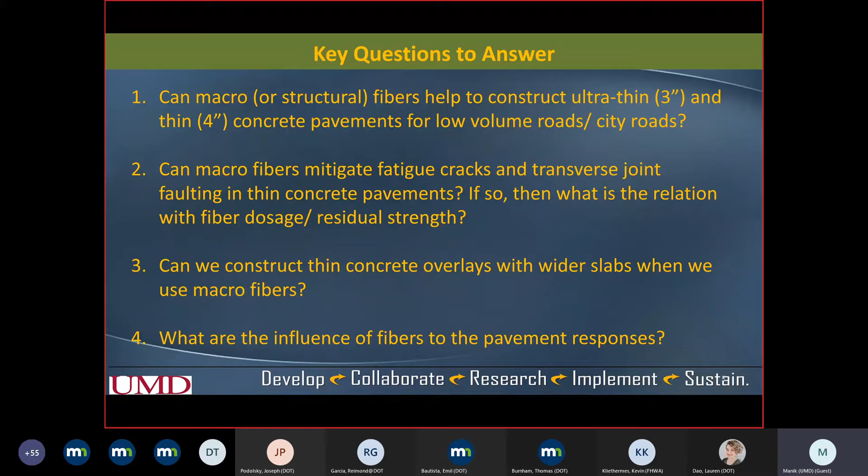Today I'm going to focus on some key questions, basically what we learned from this research project. The questions we had: can structural fibers help construct ultra-thin, like 3-inch or 4-inch thin concrete pavements for low volume roads and city roads? Can macrofibers mitigate fatigue cracks and transverse joint faulting in thin concrete pavements? If so, what is the relation between fiber dose and residual strength? Can we construct thin concrete overlays with wider slabs when we use macro fibers? And what is the influence of fibers on pavement responses? Those are the key questions, and I will be focusing mainly on these four. Let's see what answers we get.

In order to answer those questions, in 2017, 8 cells were constructed. Two were constructed on the low volume road test track, cells 139 and 239, and the others were on the westbound I-94 section of the mainline road. All those cells were designed basically for low volume roads. Even though 6 of the cells were constructed on I-94, we applied accelerated loading like under interstate traffic, but those are not designed for 20 or 30-year interstate traffic—they are intended for low volume roads.

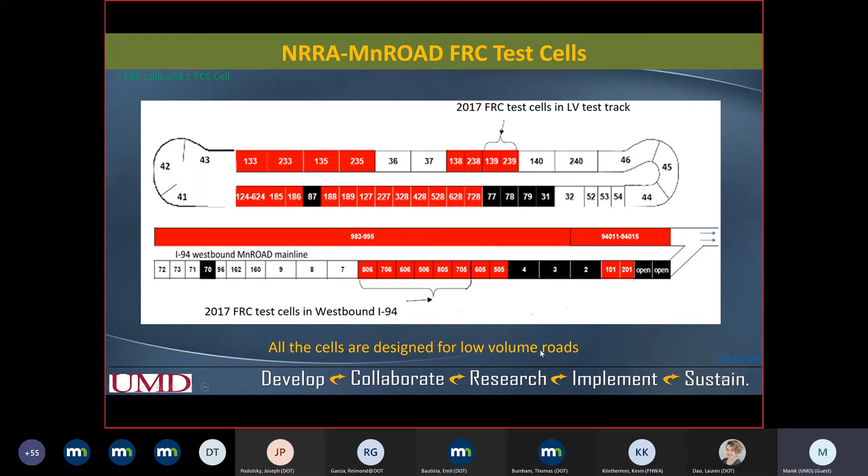So that we can see the failure early, those were constructed on the interstate. Out of the 6 cells, 4 were actually constructed on concrete, on gravel, and the other 2 were concrete overlay.

I call them pavement cells because these are directly constructed on the gravel layer, not an overlay. Cells 506 through 806 were constructed on a relatively thick base layer, 11 inches. The objective of these 4 cells was to study the influence of fiber dose variations. The first one was plain concrete, then others used fiber reinforced concrete with incremental doses.

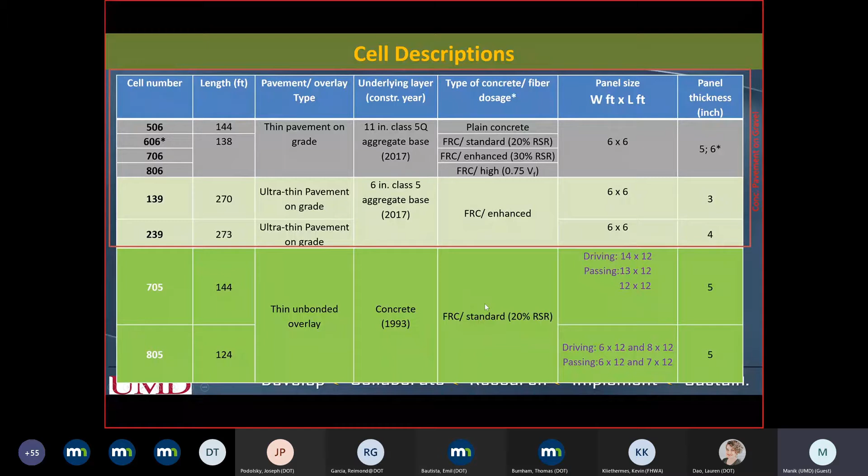Cells 705 and 805 are thin concrete overlay. I'll also be talking about the structure later on when we specifically discuss their distresses.

The picture here shows the fibers that were used in the construction of the cells other than 506. 506 did not have any fiber, which was a control section.

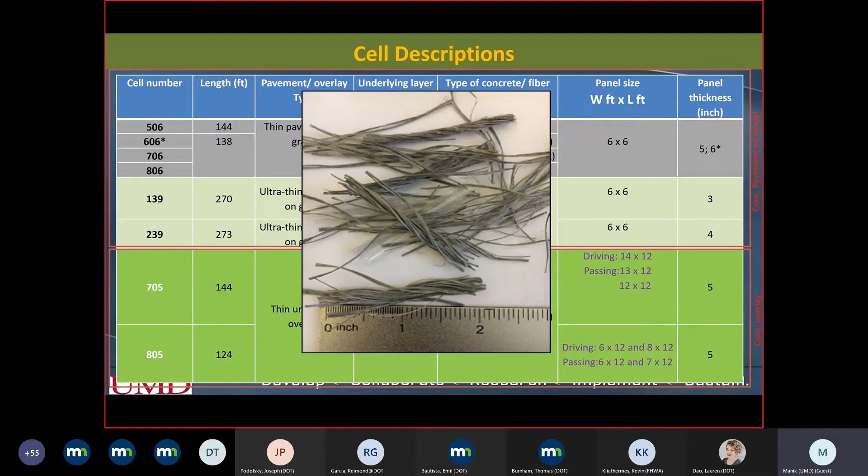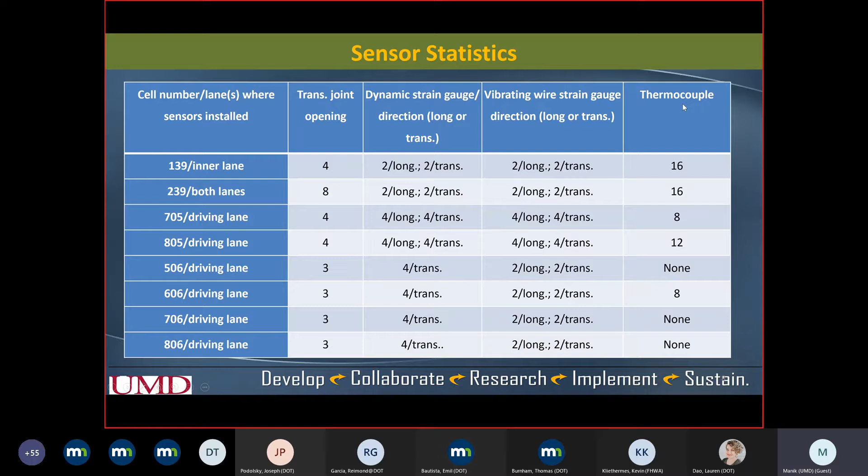These cells were heavily instrumented. I'm not going to read all the numbers of the sensors, but transverse joint opening sensors were installed to track joint movement, along with dynamic strain gauges, vibrating wire strain gauges, and thermocouples. This is an example of the sensor and test locations.

These are for cells 705 and 805. Pretty much the same kind of sensor plan was used for all 8 cells. Thermocouples were not installed in all the cells, but otherwise it's the same.

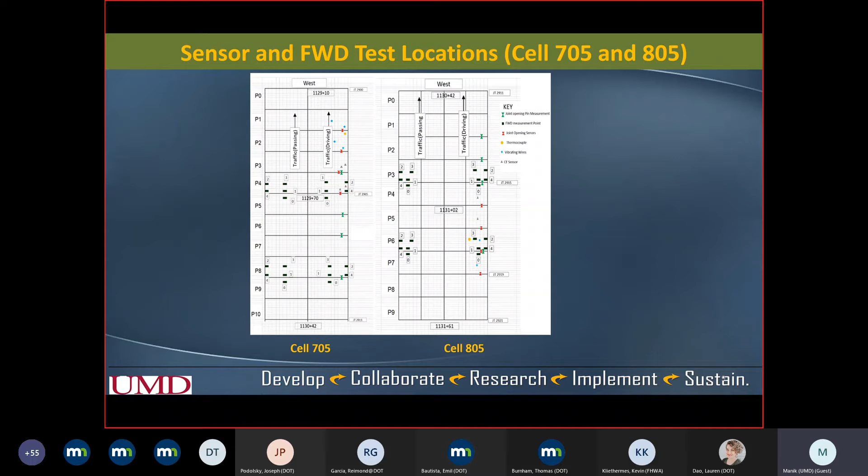These black rectangles are FWD test locations. You can see the test was done on the wheel path at the center, and at different locations of the sensors. We already have a final report from this project, which is shared online, and additional details of the sensors and test locations can be found there.

All right, let's get into question number 1. Just to remind you, the question: can macro fibers help construct ultra-thin and thin concrete pavements for low volume roads?

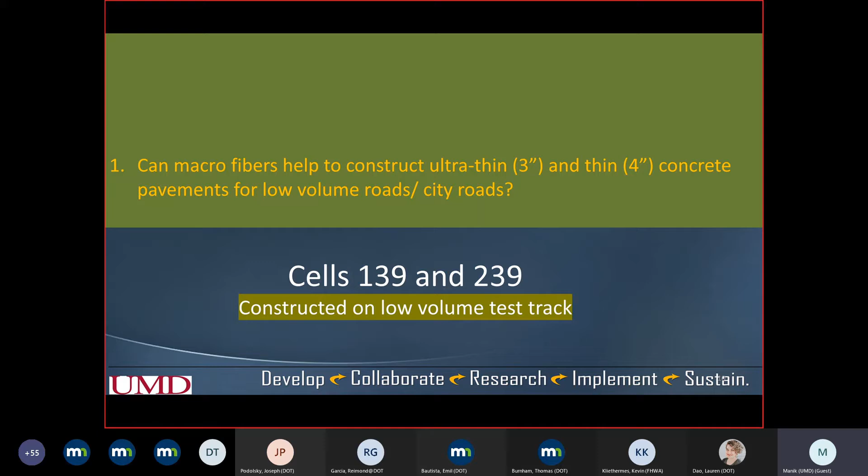We know 3-inch, 4-inch thick asphalt pavements are common surface layers in city streets. So we wondered, if we use fibers in concrete, can we do the same thing using concrete?

A little more about the structure of these two cells: Cell 139 was 3-inch and 239 was 4-inch. All other variables were the same. Fiber was 8 pounds per cubic yard, 6 feet by 6 feet slab.

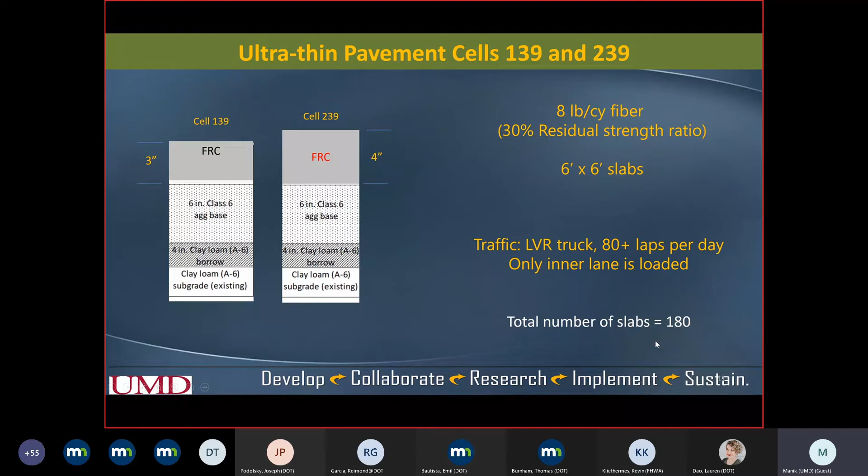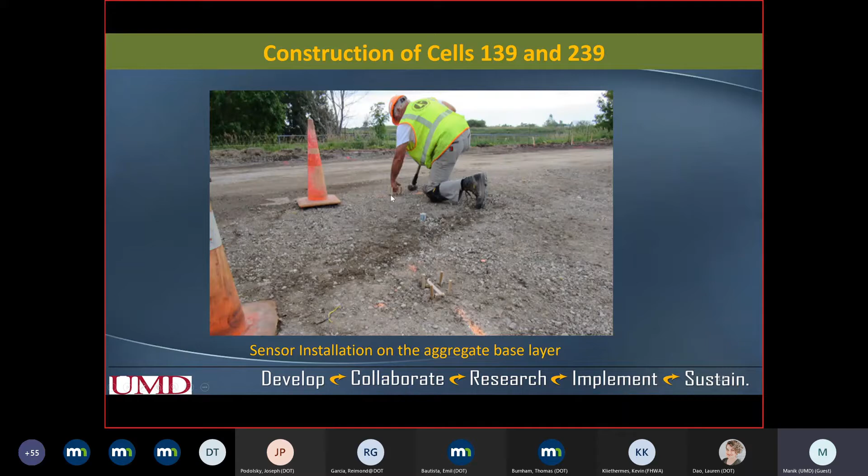Here are a few pictures of the construction on the compacted gravel layer, which is the base layer. Sensors are being installed - this is a picture of the dynamic sensor. Then concrete pouring and paving. You can see the very thin structure.

Joint opening sensors were installed later on at the transverse joint. These sensors work by comparing to an initial reading, which changes as the slabs move inward and outward.

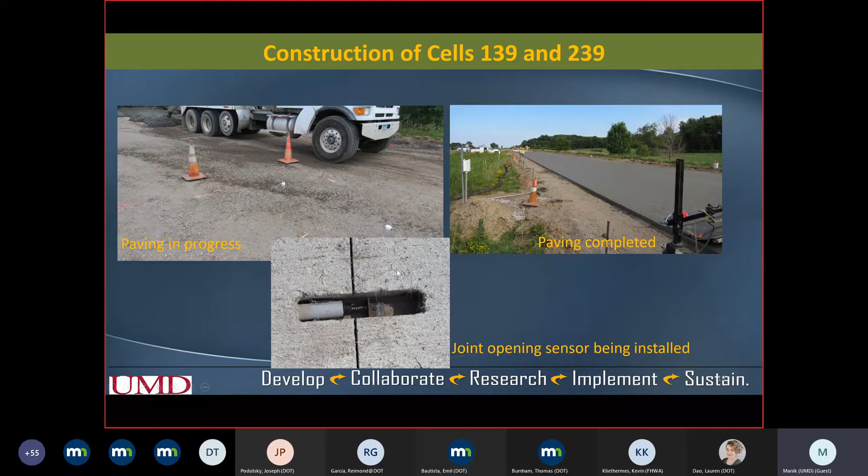Now, at a really early age, before 28 days, within about a week, construction traffic came onto cell 139, and this crack resulted right after. The crack propagated and became alligator cracking in the asphalt pavement. You can see at 35,000 equivalent single axle loads how it looks, and at 63,000 ESALs, the thin structure had shattered.

Thanks to Len for doing this distress map - you can understand how much effort he had to put into it.

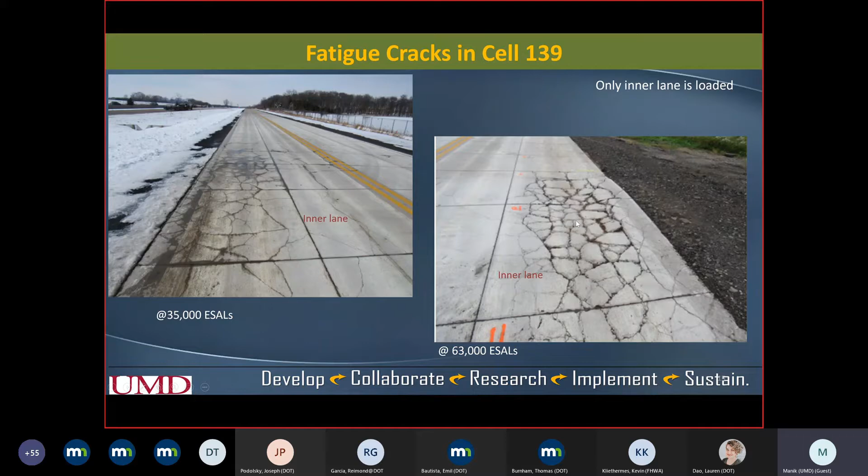So cracks all over. And then in 2018, some of these slabs, I think 14 slabs, were replaced with 4-inch thick pavement.

Now on cell 239, which was 4-inch thick, we saw far less crack. You can see longitudinal crack, and at the end of the research study's data collection, we saw 20% of slab already cracked by March 2020, which was after 145,000 ESALs. So now if we design a road on a rural road, let's say, MnDOT's traffic category 2 anticipates 1 million ESALs. So this pavement cracked, and it's still in service, but 20% of the slab cracked in 2020 itself, just at 145,000 ESALs. The picture on the right shows the location of the crack, and further details are available in our research report.

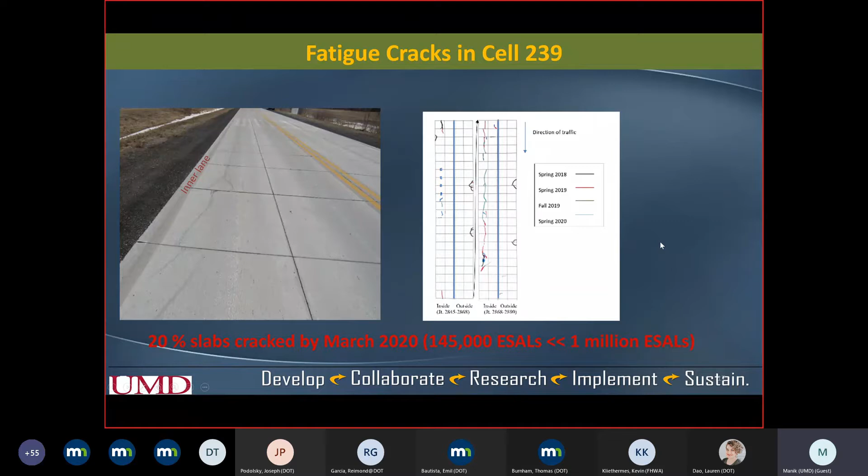These are the color-coded distress maps. You can see the crack occurred almost every year. Initially in the 2018 data you can see some black lines, and then at different years or seasons they continued to propagate.

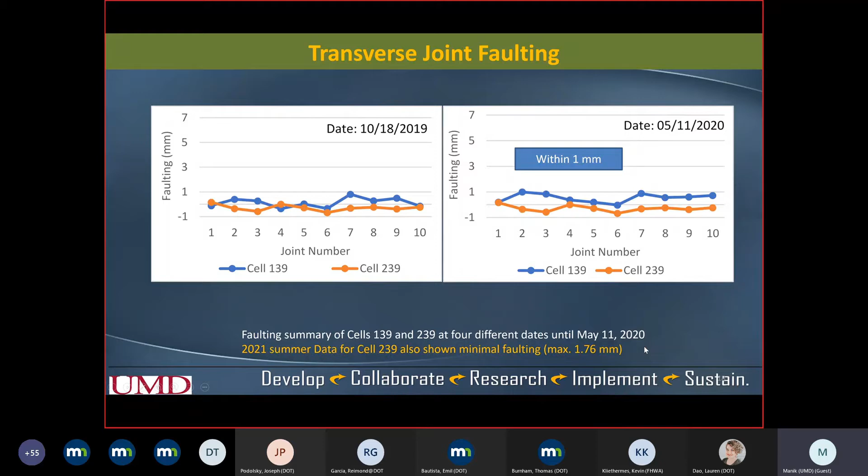The faulting was really less. You can see two different dates here, it's really very low, within 1 millimeter. Now, Tom has given me some faulting data collected this year in August, and based on his data, the faulting is still less in 239, and I checked the data. The maximum was 1.76 millimeters at a couple of joints. So faulting was not an issue. The cracks were the issue.

So what you learn is that the 3-inch slab was too thin on a 6-inch gravel base. The construction of such an ultra-thin slab on a marginal base is not recommended, as they may fail before the anticipated design life, irrespective of fiber inclusion. But fiber was found to be holding the shattered concrete pieces of cell 139 together for some time. Cell 239, which was 1 inch thicker, is still performing, but of course cracked. More than 20% crack was there in 2020 itself, but the performance is significantly better than 139, and fibers are holding the cracks together. So that's the kind of visible observations we have seen.

The longitudinal cracks in the wheel path are the dominating distress, and it makes sense because the structure is very thin, so the stress is right under the wheel path because the load stresses in the very thin concrete are really high. Joint faulting, as we saw, was not an issue so far because we saw the cracks earlier, and the total number of ESALs on these 139 and 239 cells were really far less than the anticipated design ESAL, so we did not see any faulting. Faulting takes some time to occur.

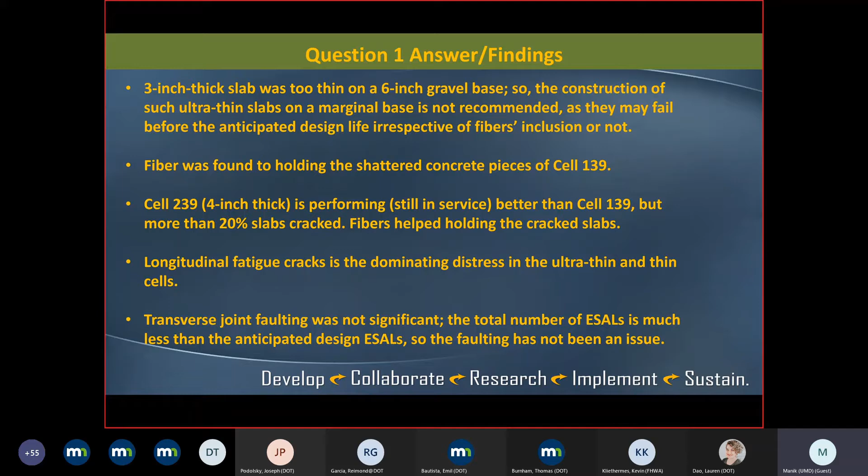I mean, time or traffic load repetitions. Question number 2: can macro fibers mitigate fatigue cracks and transverse joint faulting in thin concrete pavement? And if so, what is the relation with fiber doses or residual strength ratio?

So in order to get the answer for these questions, we will focus on the results of cells 506 through 806. And I would remind you, these were constructed on I-94, but the design is intended for low volume roads. The design thickness is only 5 inches, which is not typical for an interstate pavement. 2 million is also MnDOT's low volume road traffic level 2 category, so let's say the design is 2 million.

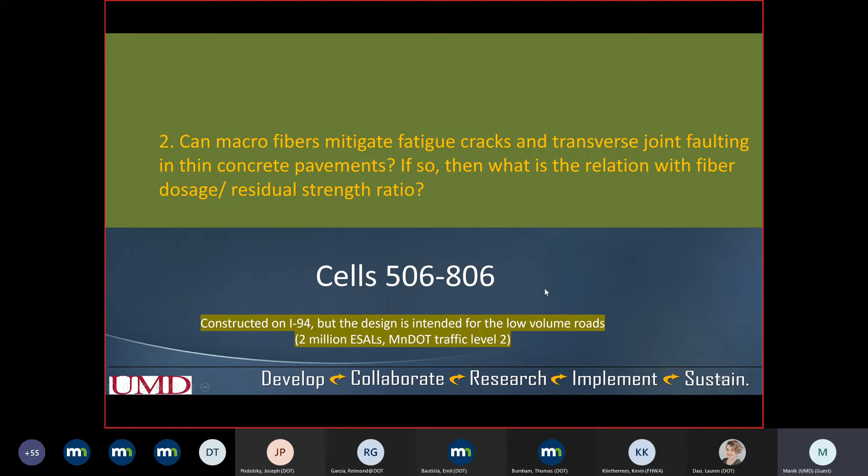A little bit about the structure. Cell 506 didn't have any fibers, and it is 5 inches thick. Cell 606 has fiber, 5 pounds of fiber per cubic yard of concrete, and we targeted a 20% residual strength ratio. Even though it was planned to be constructed at 5 inches, somehow the construction thickness was found to be 6 inches. Cells 706 and 806 are 5 inches, and had more fibers, with 806 the highest at 11.7 pounds of fiber, which is a lot of fiber to mix into the concrete pavement.

Traffic, again, it is interstate, generally about 1 million ESALs per year. This residual strength ratio reported is from ASTM C1609 tests on beams prepared at the site, which were brought to the lab and tested. Again, a little reminder about the structure: right under the slab, we had 11 inches of class 5Q aggregate base. The last one, for cells 139 and 239, had 6 inches. Now it's 11 inches, you can see, and it makes sense, since it's on the interstate.

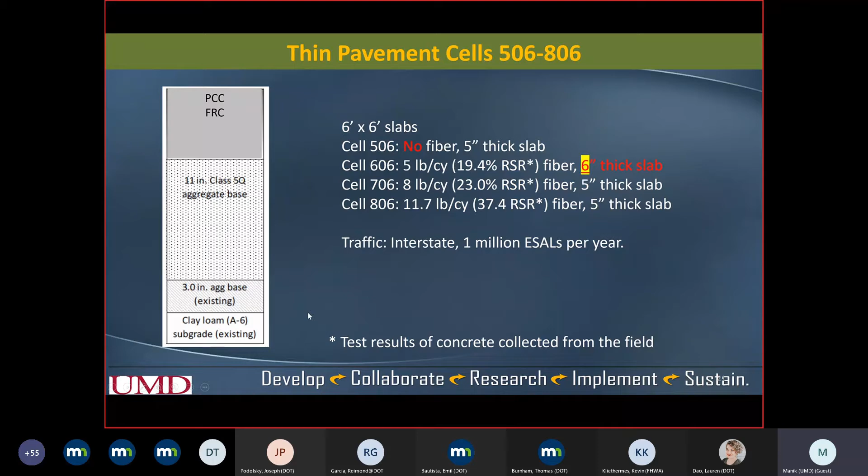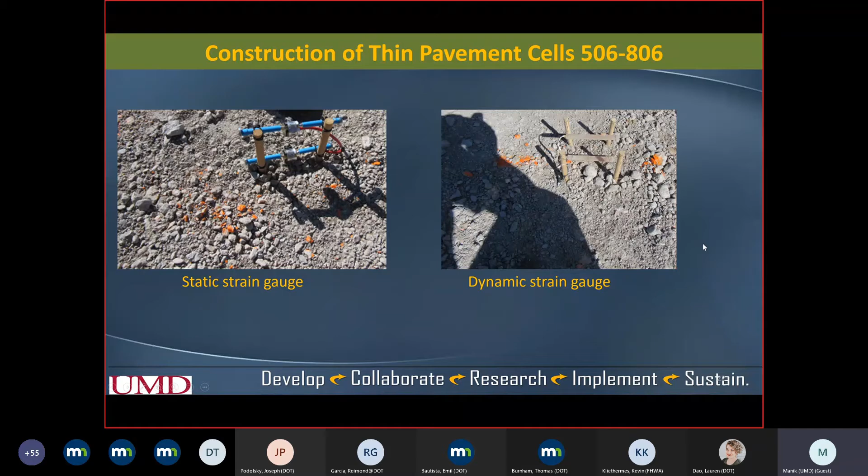A couple of pictures here - this is the static strain gauge, and this is the dynamic strain gauge picture. I was there when cell 806 was paved. These are some pictures I took, or also collected from my MnDOT colleagues. I'm sorry about the resolution because of the virtual presentation - I kept the file size small so there's no delay.

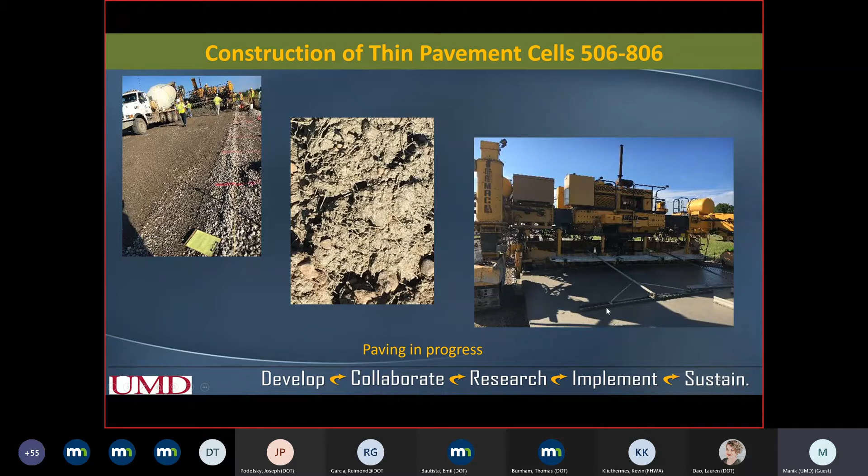This is a close shot of the concrete I took. It looks like there were some issues in the mixing, but overall the mix was not bad - it looks like good workable concrete.

Well, not all. This picture shows some sample preparation - you can see they're preparing the beam on the side. This is a close-up picture of the concrete, how it looks.

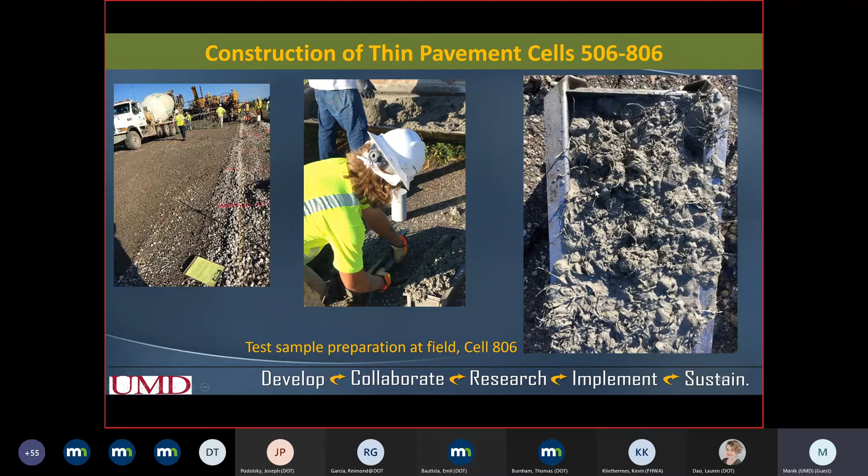It looks good and workable, but look at the fibers - this was from 806, which had 11.7 pounds of fiber. Fibers are all over, you can see. The nature of the fiber was that it did not remain very straight - it took the shape along with, basically followed, the aggregate shape.

Well, not everywhere was the workability great - this is one very popular picture. Again, cell 806 had 11.7 pounds per cubic yard of fiber, and I saw something like that happen too. But anyway, eventually this is the finished product.

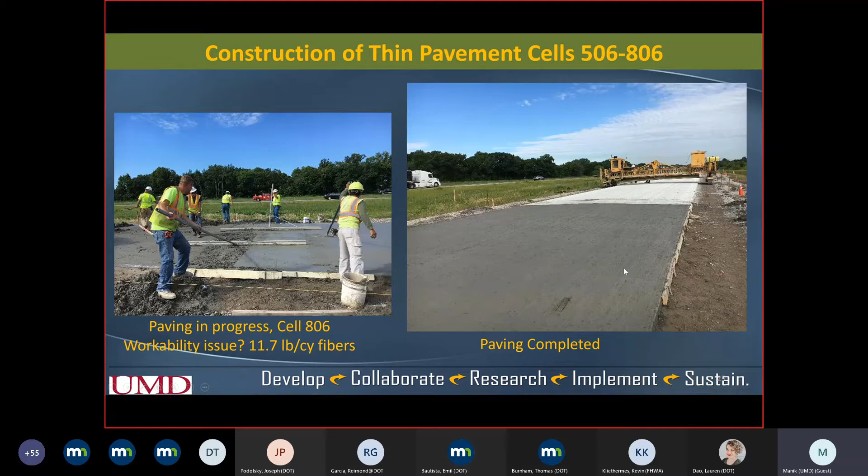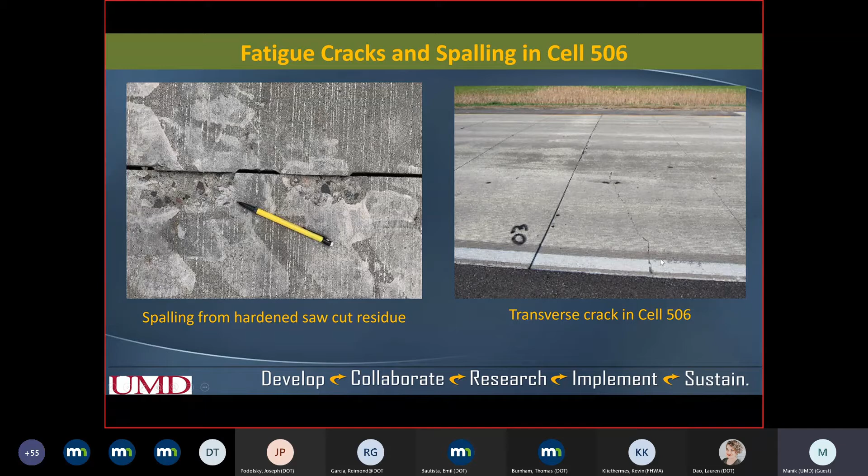We saw cracks in 506 in the first year itself. The total number of cracks we saw in cell 506 was 3, and all of them occurred in the same area. You can see on this picture the location of the spalling and the location of the crack - all 3 cracks actually occurred at one location. I'm not sure, but it looks like this zone probably had some problem, or something is different in the base.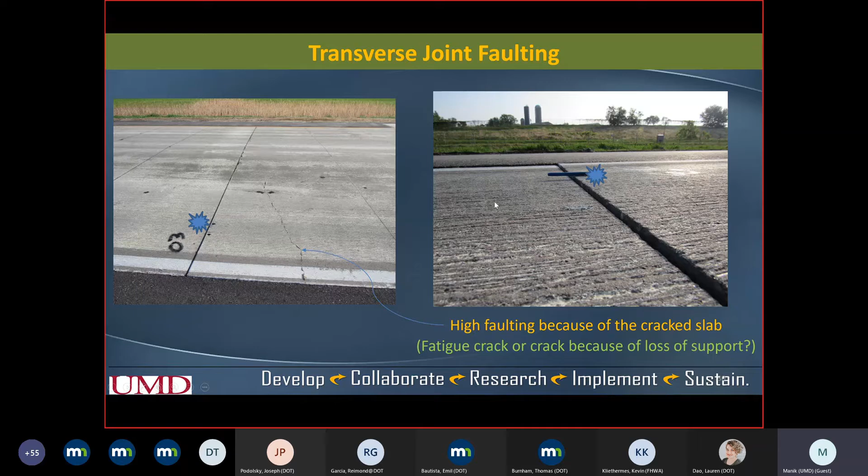When we looked at the faulting data for the 4 cells and compared them, definitely 806, which had the highest amount of fiber at 11.7, had less faulting than cell 506, which had no fiber. You can see here this blue line versus the brown line.

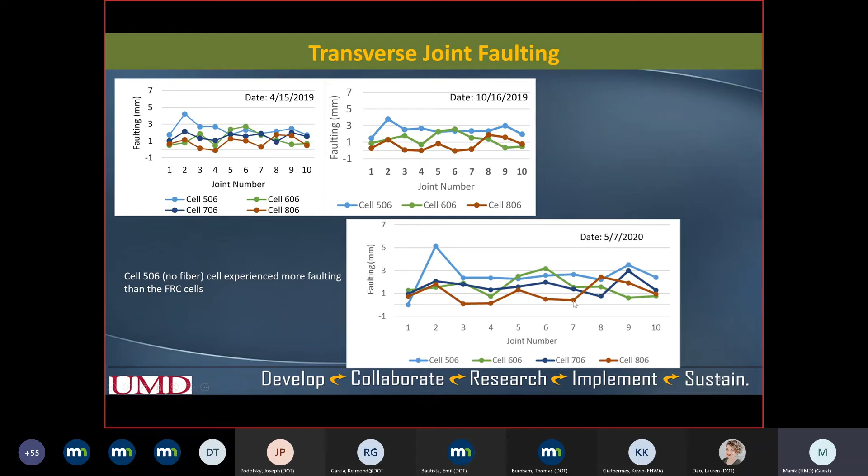And then you can see this effect of fiber dose. Cell 506 did not have any fiber, and their faulting was more than the other cells with 8-0-6 low. Now all these cells have data from different dates. As you can see, the first blue is April 2018, and the last one here is 2020. So all the cells' faulting increased with the traffic.

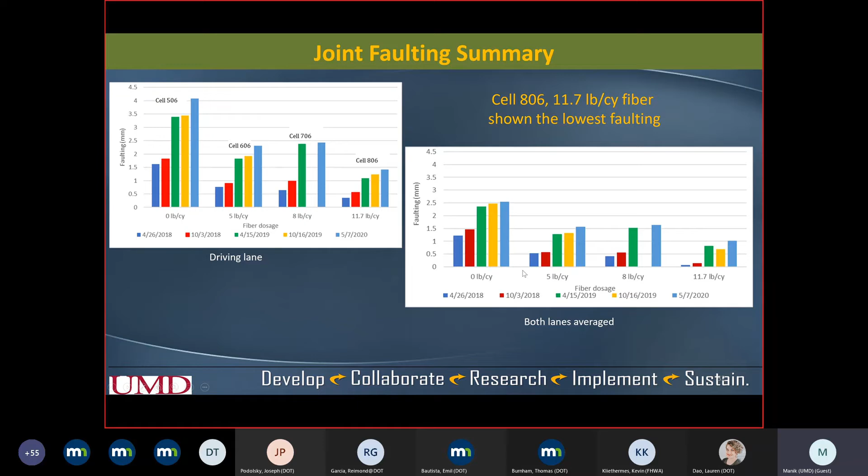Now this was only the driving lane, and this is both lanes when we averaged. Tom has provided some data for August 2021 this year. We saw here eventually the faulting of all the cells increasing aggressively. Maybe the fiber's effects are gone or going. So you can see now 506, 606, 706, 806 have almost the same or similar faulting values now. And this is again the driving lane and the both-lane averaged.

All right, now, yeah, but it is outside the design life.

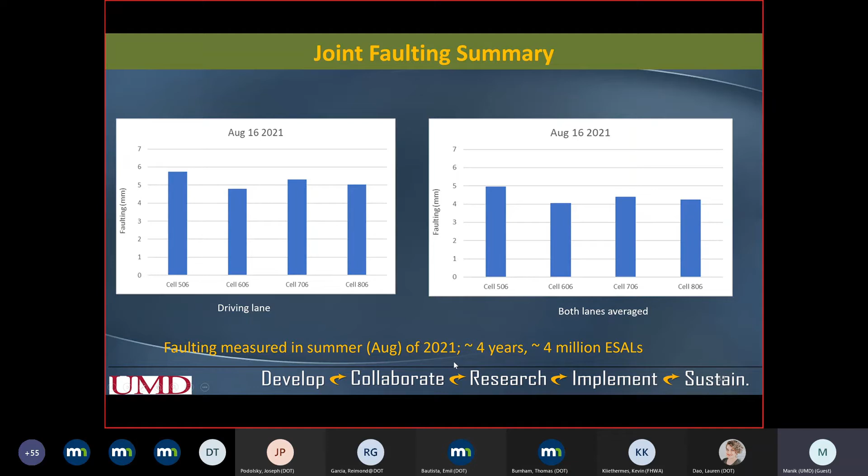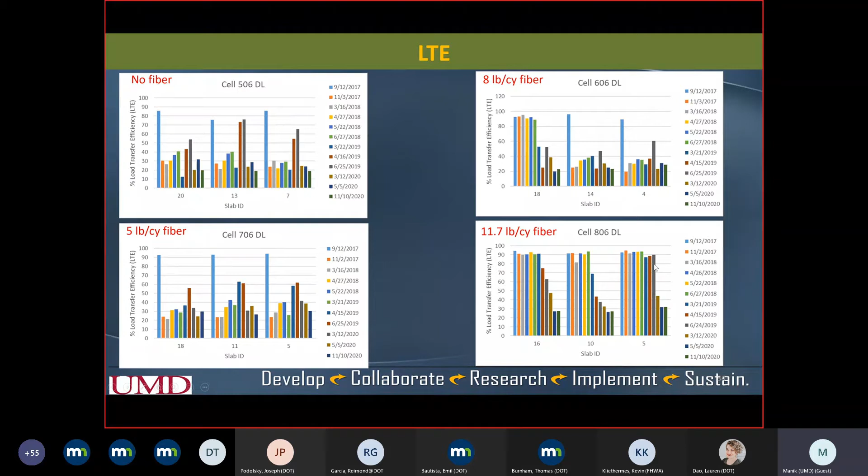When we looked at the load transfer efficiency with no fiber, we saw the load transfer in the very first test was really high, and then after that it really dropped. Now 606, 706 had 5 pound and 8 pound fibers. Their behavior was not significantly different from the plain concrete, but cell 806, which had around 11.7 pound fiber, you can see with different dates, the load transfer did not decrease until about 1.8 million ESALs, and at 1.8 million ESALs the load transfer dropped significantly, not in almost all the joints, but 1 or 2 joints probably didn't show that much decline.

This one, faulting versus ESALs for the 4 cells, again 506, you can see it has increased. Others also increased, but after 1.8 million ESALs, you can see all the cells suddenly had faulting suddenly increase.

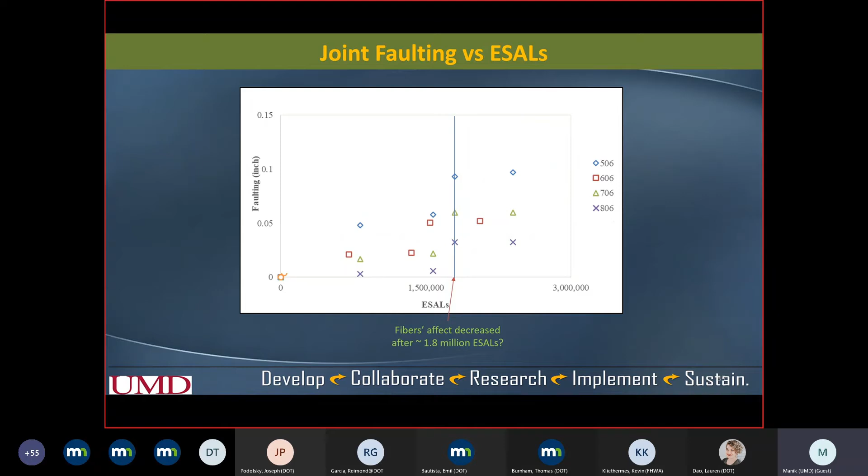We also looked at the International Roughness Index, and we coined a factor called faulting index. Faulting index basically takes care of the faulting for all the joints, and then if you convert it into per mile, the unit inch per mile is the same as the unit for the IRI. So these lines are basically faulting index, and these bars here are the IRI.

So the IRI values for the plain concrete were high from the very beginning. You can see the blue line here. When you looked at the IRI value, we found out that at 1.7 million ESALs, the IRI actually exceeded the critical value, like 173 inches per mile, and at that time faulting was 0.1 inch.

So what I would like to say here is 6 foot slabs have twice the number of joints compared to conventional joints. So if we drive on faulted joints of the smaller slab size compared to like 12 feet by 12 feet, which is used in conventional pavement, the IRI can be high because of more joints even with less faulting. So the faulting value is 0.1 inch here, but the IRI actually exceeded the threshold value. We also developed some relation between the faulting index and IRI, and we saw there is a good correlation, like more faulting, more IRI.

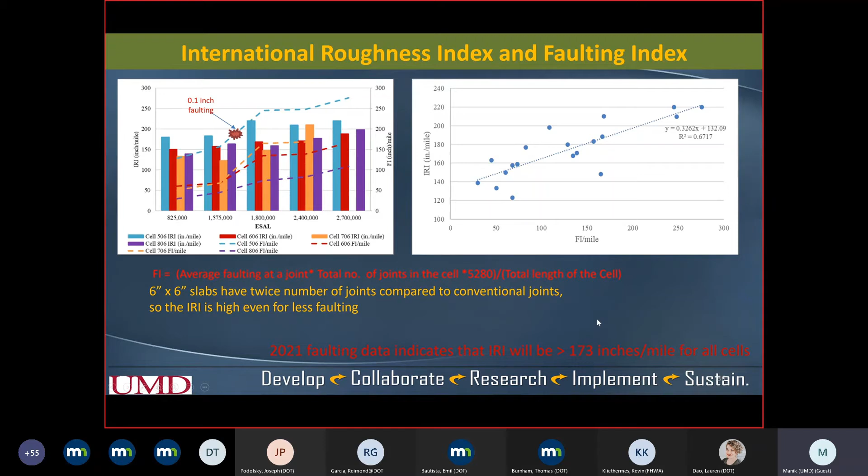So what we learned from this, 506 to 806: with regards to fatigue cracking, only cell 506 experienced 3 cracks at one location. Therefore, it is hard to quantify the contribution of fibers in mitigating fatigue cracks from this study. Regarding the faulting, fiber influence was observed in cells 506 through 806. Cells 606, 706, and 806 showed less faulting than cell 506 with no fiber.

With enough loadings, far more than typical design, significant faulting eventually developed in all cells. Fibers were holding the LTE higher for up to 1.8 million ESALs. IRI for cell 506 exceeded the threshold of 173 inches per mile at 1.75 million ESALs. FRC cells did not reach that even after 2.5 million ESALs. So fibers contributed to keeping the IRI better.

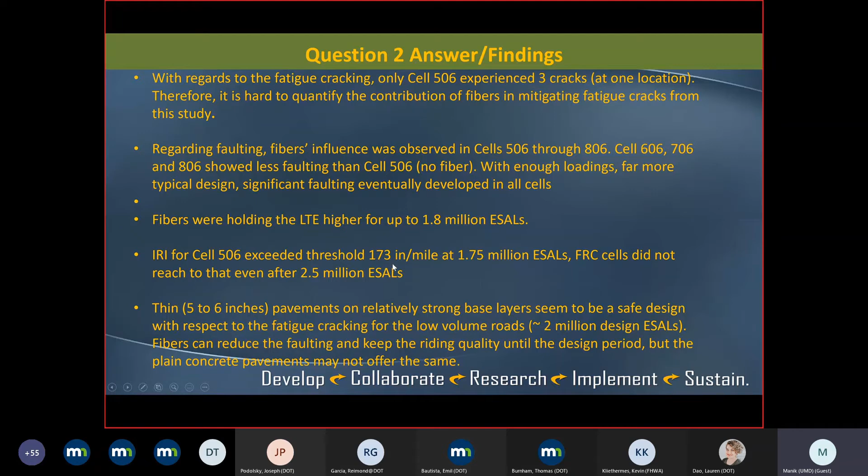So thin pavements on relatively strong base layers seem to be a safe design with respect to fatigue cracking for low volume roads up to 2 million ESALs. Fibers can reduce faulting and keep the riding quality until the design period, but plain concrete pavements may not offer the same. We saw the 506 cell reached the critical value of 173 even before 2 million ESALs.

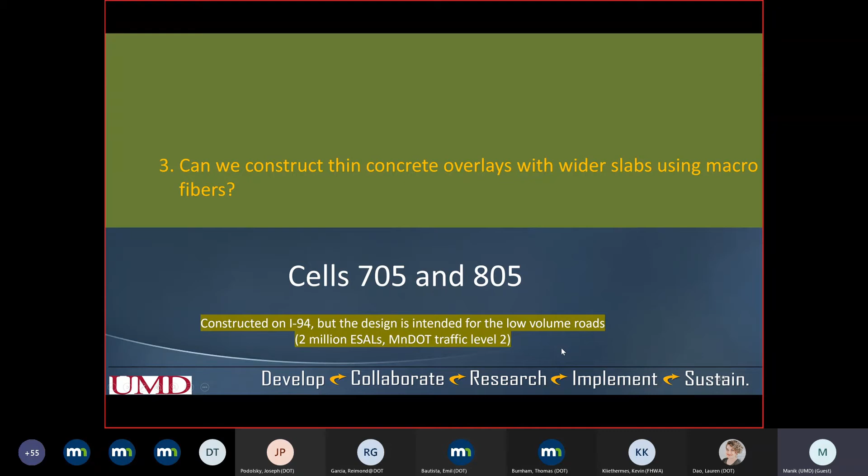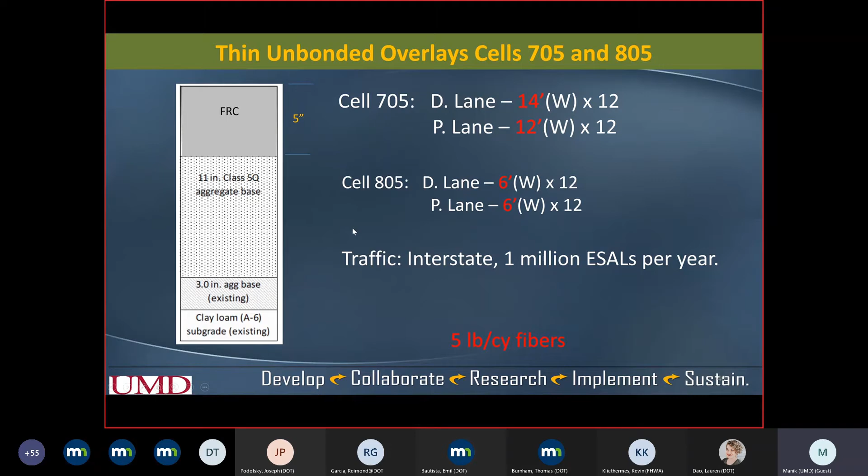Question number 3: Can we construct thin concrete overlays with wider slabs using macro fibers? For that, the data of cells 705 and 805 were used. Again, those cells were constructed on the interstate traffic, I-94. Cell 705 had larger size slabs, 14 feet by 12 feet, and 12 feet by 12 feet slabs in the passing lane was the slab size. The width of slab for the other cell was 6 feet, or half of cell 705. Again, interstate traffic at 1 million ESALs per year, and the fiber used here was 5 pound.

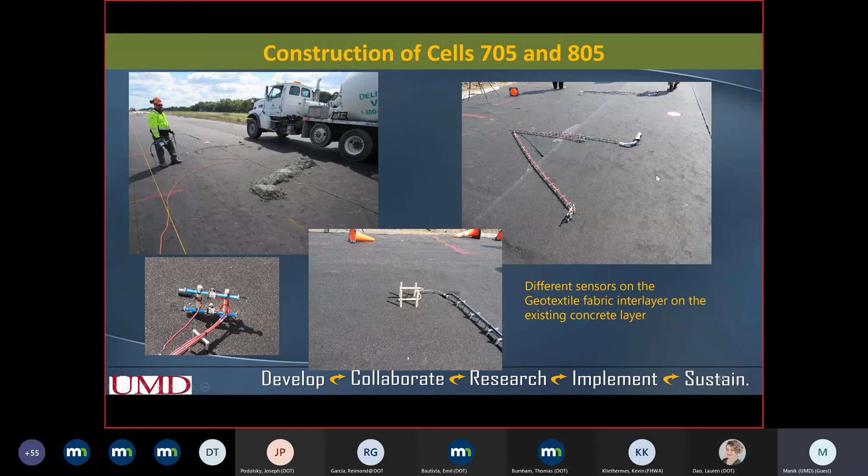These are some pictures from during the construction time. Some sensors you can see installed, and this overlay was constructed as an unbonded overlay. You can see a geotextile fabric interlayer was used on top of the existing concrete before placing the new concrete. Here are some more pictures, and this is the finished product.

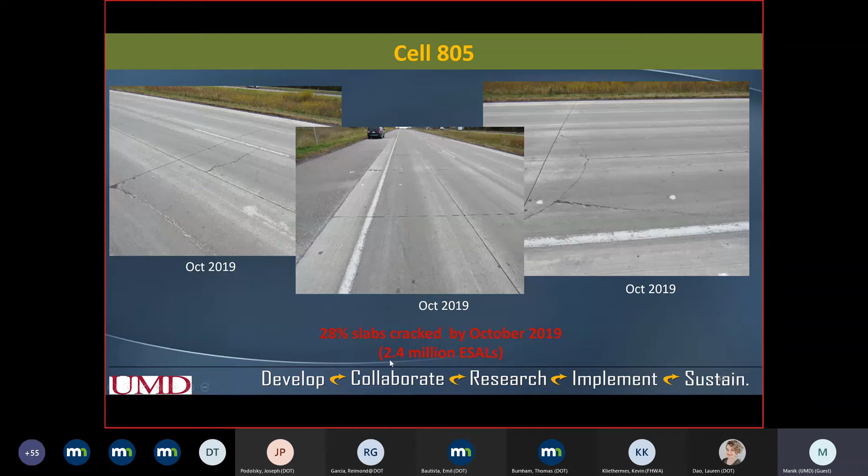Now these two cells showed significant fatigue cracks. 55% of slabs cracked for 705 by October 2019. For 805, it had a little less, 28% slab cracked compared to 55% for 705, by October 2019 after 2.4 million ESALs. Here are some more pictures.

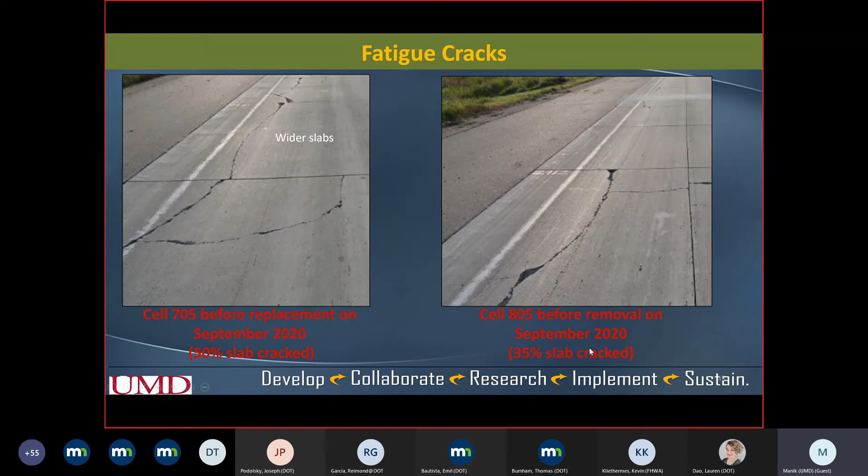By September 2020, 35% cracked in 805. Again, 805 had a little less, 15% less. These graphs show the percent slab cracked, 50% versus 35% with 805, which had a smaller slab size. But when we look at the crack length per unit foot length of the cell, it's kind of the same, though the number of slabs cracked was more in cell 705, which has the larger size slab.

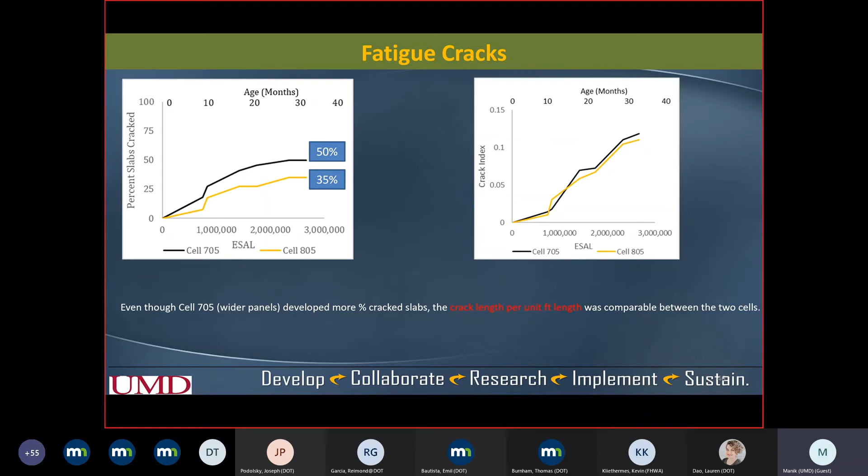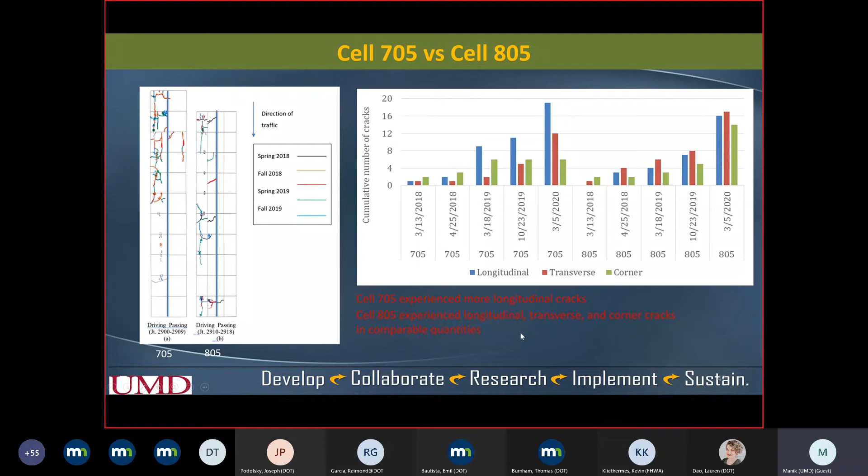When we looked at the faulting, faulting was very low for these cells, I mean less than what we have seen in the 506 to 806 thin concrete pavements. These are overlays on geofabric.

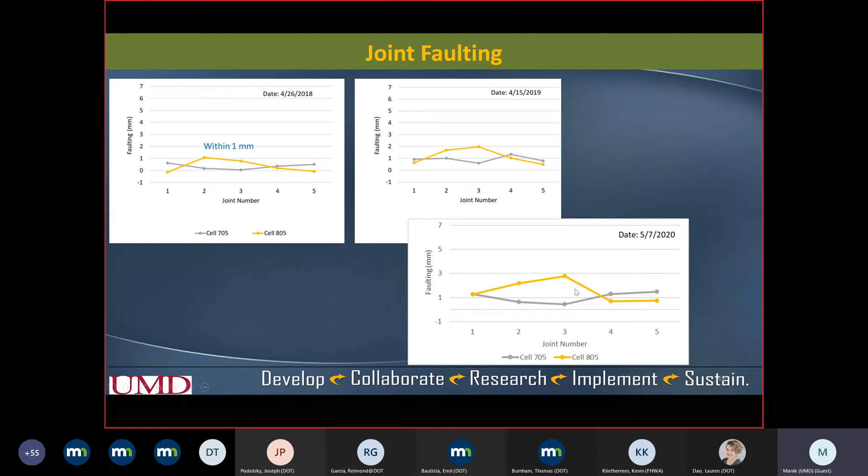We saw less faulting. When we looked at the FWD test results, initially you can see the load transfer efficiency was low for both cells. Then it kind of changed randomly, or I don't know if there is any pattern, but some dates showed really high load transfer efficiency, at least on the joints where the LTE was measured. So LTE was initially low.

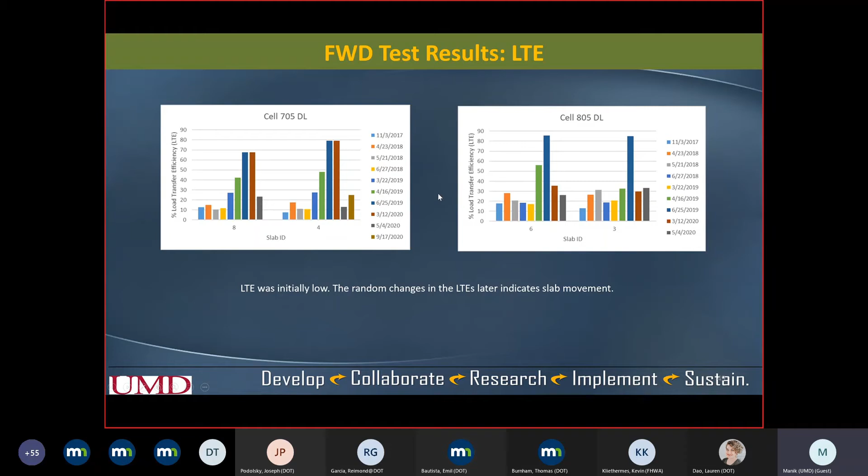The random changes in the LTE later in life indicates slab movement. I'm not sure, but it looks like the slabs kept moving on this geofabric layer, and that's why LTE depends on the crack width - I think that probably has a role to play. Also, the lower LTE initially is probably because of absorption by the geofabric layer, which could absorb a good amount of load. That's probably also resulted in low load transfer efficiency in the beginning.

So the load transfer efficiency, or the high deflections under the FWD load, makes sense because probably the geofabric was absorbing some of the deflections, some of the load, creating high deflections.

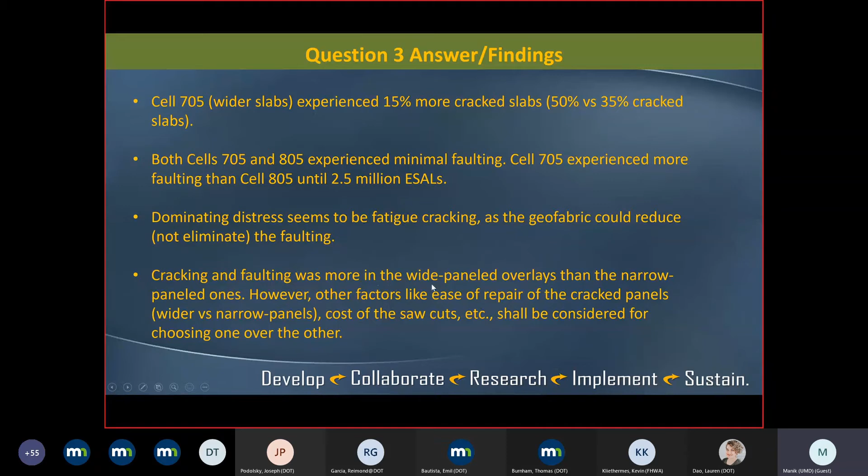So the answer to question number 3: cell 705 with wider slabs experienced 15% more cracked slabs. So if we are thinking, can we construct wider slabs using fiber? Looks like no. Both cell 705 and 805 experienced minimal faulting. Cell 705 experienced slightly more faulting than cell 805 until 2.5 million ESALs. The dominating distress seems to be fatigue cracking, not faulting, unlike the other cells we have studied in this research. Cracking and faulting was more in the wide panel overlays than the narrow paneled ones.

All right, the next and last question I will be answering is, did we see any influence on the pavement responses? Well, candidly speaking, we did not find a significant influence of the fiber on the structural responses, but we did establish some structural responses of thin concrete pavement overlays in general.

The temperature data we collected at different seasons was used to calculate the depth versus temperature relationship, basically the gradient or temperature variations with respect to depth. Unlike conventional pavement, you can see the temperature gradients are quite linear, and the variations are different at different temperatures. This was in July, this is April, kind of intermediate, and this is in the middle of winter.

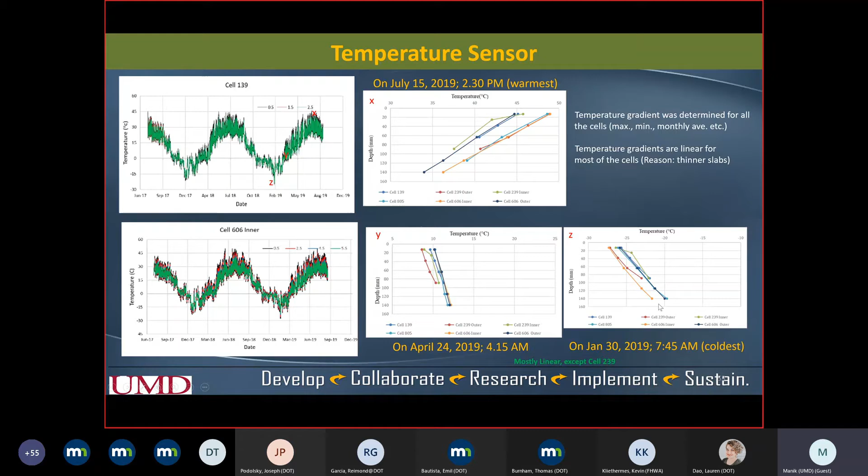We saw that about 60% of the time at MnROAD, a negative temperature gradient was present.

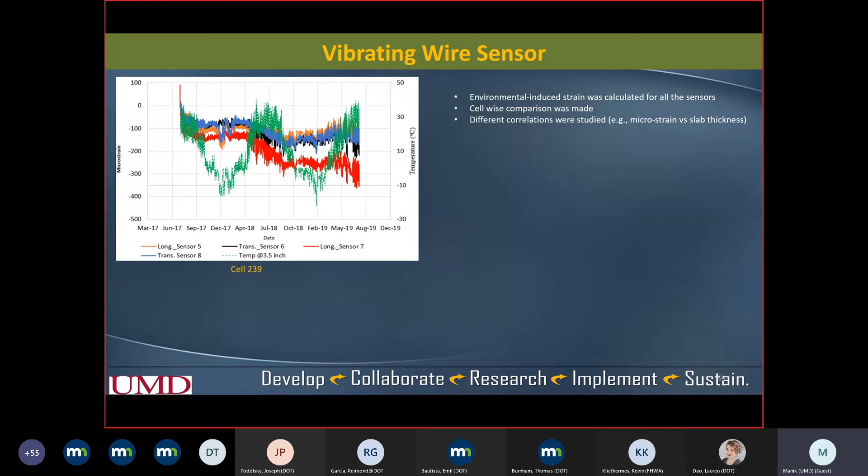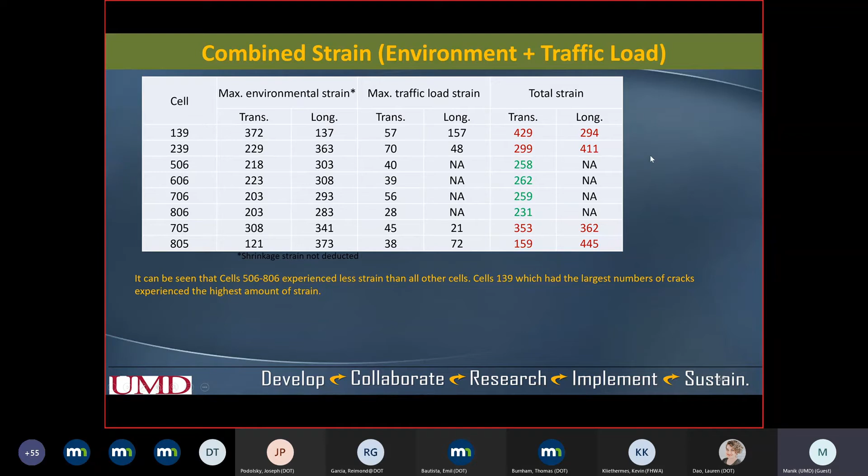We collected vibrating wire sensor data and analyzed all the sensor data for all the slabs. We also analyzed the traffic loads and induced strains. I won't go into far detail, but cells 506 through 806, constructed on 11 inches of base, had less strain than cell 139, which as expected had more, about 429 microstrain.

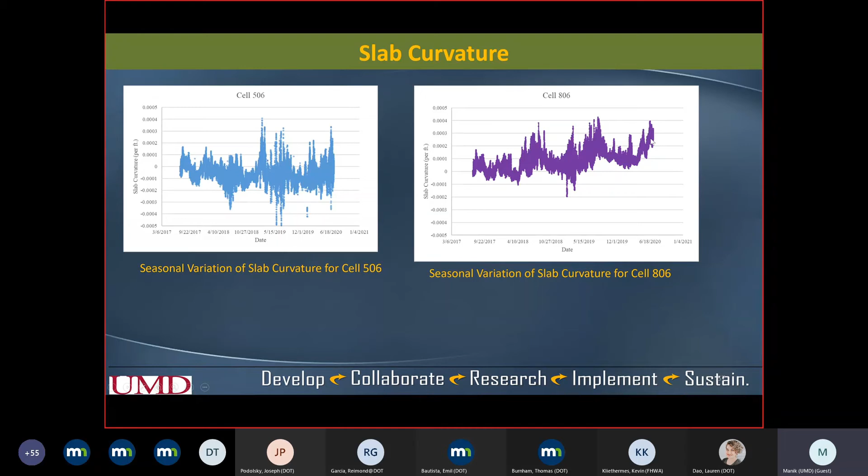We also looked at slab curvature, 506 versus 806. You can see the variation in slab curvature was greater in 506, which had no fiber. It appears the fiber provided some resistance to slab curling and warping. That's what we found.

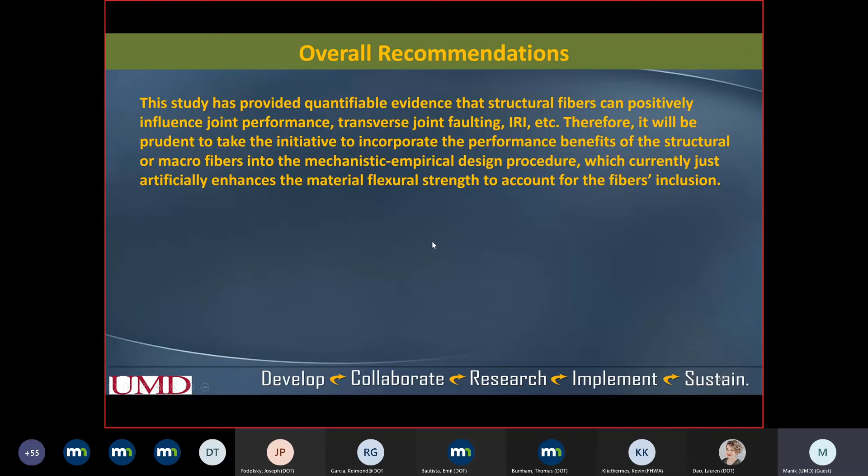Overall, this study has provided quantifiable evidence that structural fibers can positively influence joint performance, transverse joint faulting, and IRI. Therefore, it will be prudent to incorporate the performance benefits of structural or macro fibers into the mechanistic empirical design procedure, which currently just artificially enhances the material's flexural strength to account for fiber inclusion. That's the key message I'd like to leave you with, and that concludes this presentation.

I planned on taking 40 minutes, but it's 10:43. Looks like 3 minutes was spent in the introduction. So Lauren, would you allow the audience to ask questions right now, or should Tom go first and finish his presentation? I'm good either way. I think we'll just move over to Tom, and then we can open it up for questions. Okay, great.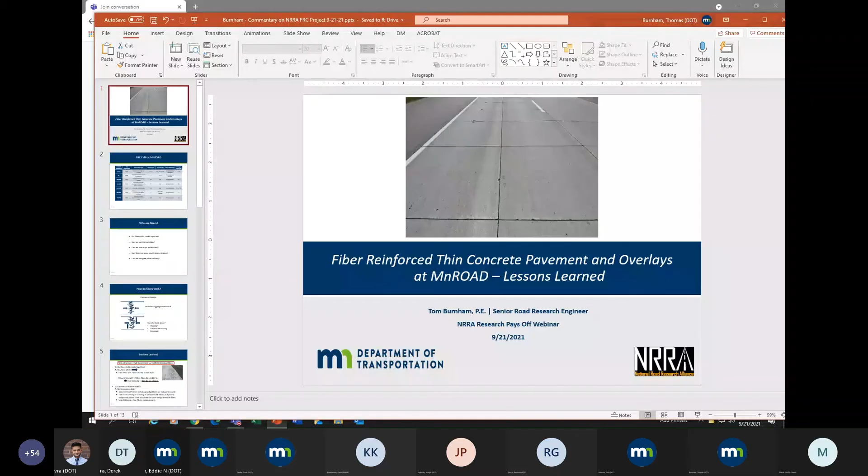So I unshared my slides. Are my slides showing now? Looks like we've got Tom's up. Yep, I can see yours, Tom.

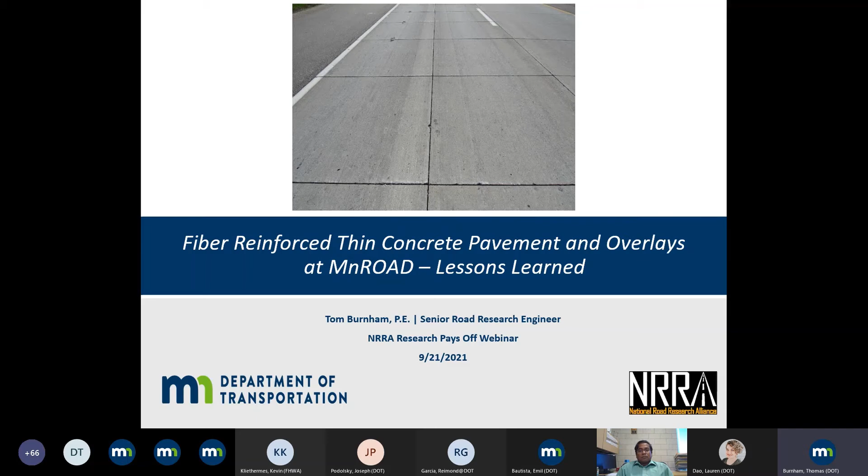At MnROAD, we've had quite a history of examining fiber reinforced concrete in thin concrete panels, whether on grade or in overlays. You can see here, starting back in 1997, the type of fibers we were putting in, at least the polypropylene, were more what we'd now call shrinkage fibers, very small diameter and very short. At the same time, we had a polyolefin, which would look more like our modern structural fibers, but at the time nobody really understood how much to put in, so we put in a massive amount compared to what we're doing now.

So you can see we were playing around with different variables. Everything's very thin, less than 6 inches. We tried different panel sizes and learned a lot about how they perform. Same with dosages, and a good example this time is that 506 to 806 test ranged anywhere from no fiber all the way up to 12.

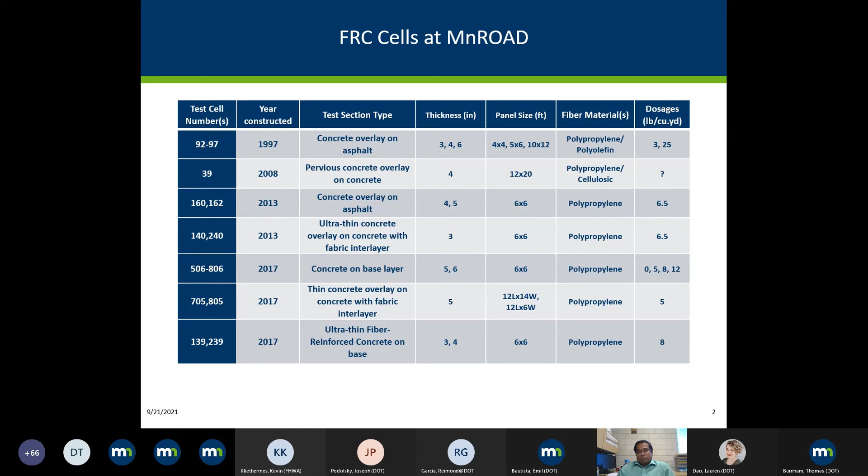Just to review what questions we're trying to answer here: why use them? Do the fibers hold the cracks together? Can we use thinner slabs? Can we use larger panels? Can the fibers serve as load transfer devices? And another interesting one is, can we mitigate panel shifting? That's something we've seen in several concrete overlays.

How do we expect these fibers to work? Really, the fibers work in passive activation, meaning you need the crack to form first. They're not going to prevent the crack, but become active once the crack comes about or within a joint system. If this is a crack, we want it to hold the crack together. If this is a saw joint, we want to keep the aggregate interlock action as long as we can. But over time, several joints separate wide enough that aggregate interlock is not available anymore. Then we want to know, can these fibers act alone to help transfer the load across the joint? But because it's so wide, we have to worry about slippage of the fiber out of the concrete, inelastic stretching so the fiber becomes floppy within the gap, and also just breaking the fiber from excessive forces.

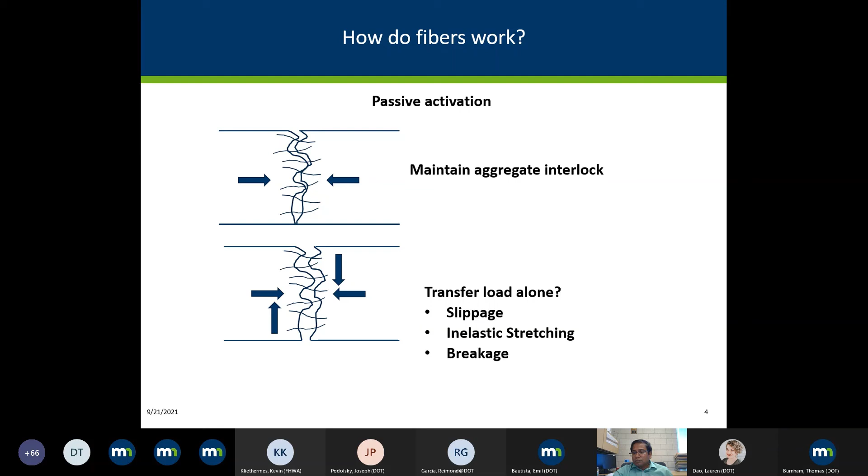I want to talk about some lessons learned from all this experimentation, including this project I just finished. These are my opinion, based on a limited set of structural fibers we've actually tested. We've only had two different manufacturers, but I'd suggest the type of fibers we're using are very commonly used amongst the pavement industry across the US. Some of the answers match what Manik portrayed in this most recent study, but this is more based on everything we've been learning over time.

So the question: do fibers hold cracks together? I would say yes, they do. We have this example of the very thin one — those chunks would not be staying there if there were no fibers. That was rutted about 2 or 3 inches, and those chunks would have just been pushed to the shoulder. So they do have that capability.

At the same time, on many of these experiments I've been able to go out and just pick up a chunk and pull it out by hand. So either the fiber slipped out of the matrix or it doesn't have enough capacity. I looked it up, and an interesting fact: when you see the specifications from the manufacturer, they say this has a flexural strength of 90 KSI. It sounds very impressive.

But that's based on the fact you'd have a 1-inch area of fiber all packed together. We have individual fiber strands, which if you start doing the calculation, ultimately gives a load capacity of 20 pounds per strand. So now you can understand why somebody could just walk over, pick up a chunk, and pull it out of the matrix. They really need to be quite concentrated to survive some of the loadings we're putting across the joints.

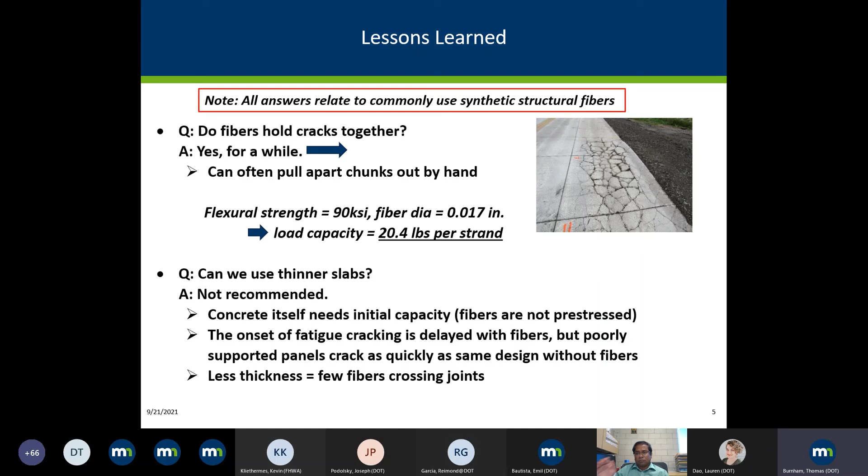Manik alluded to the fact, can we use thinner slabs? I'd agree that we're not there. The concrete itself needs to have that initial capacity because these are not pre-stressed fibers, so the concrete has to be able to take the initial load. We have seen, however, that if you have fibers in there, fatigue cracking can be delayed, so it has more capacity — that's been proven in the laboratory. That's really where some of the criteria for residual strength came from, the fact that once you put fibers in it, you do have more capacity. But I'd argue that at least the fibers we've been using aren't enough to start thinning things up substantially. And the thinner you go, the fewer fibers you're going to have crossing the joints — that's really where we're focusing our efforts.

Can we use larger panel size? I agree with Manik, definitely not. Whether they had fibers or not, these thin, large panel overlays, I believe they curl too much. No matter how you slice and dice the panel size, if it's too large, it's going to crack. What's interesting is next to these two fiber reinforced cells is a set of cells we constructed several years ago that just had 6x6 panels, no fibers, but sitting on the same concrete overlay on a fabric, and they're actually performing quite well. So this tells us the fibers are not going to save us, and they're not going to allow us to increase our panel size beyond the typical 6x6. For something this thin, you're talking about a 5-inch pavement overlay.

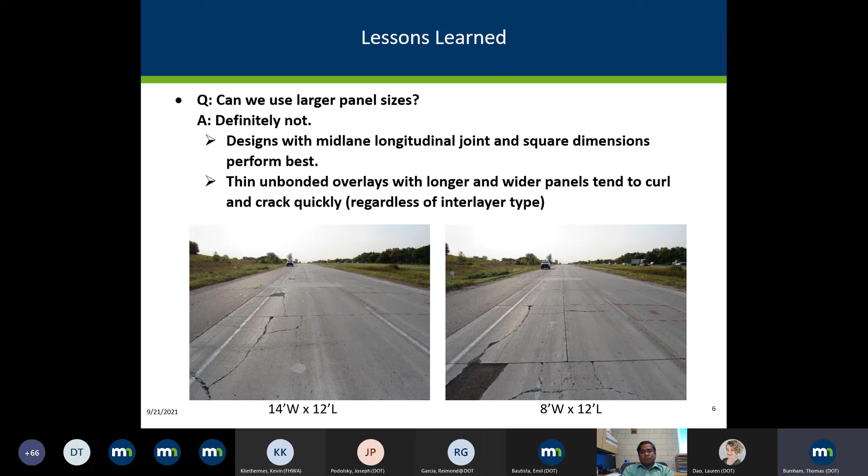Can fibers serve as load transfer devices? I would say not enough right now. We have seen at very high dosages, dosages so high that you start getting into placement issues, very difficult to finish the surface. We did see it did delay, it did work for a while, but eventually it wears out. Same with the faulting, where we had no fibers, it was nearly immediate faulting going on. You put enough in there, it does have an effect, but is it practical to put that many fibers in?

Can we mitigate panel shifting? I would say yes, we have seen evidence of that very much. Even Illinois has reports showing that when they put fibers in, you do mitigate the panel shifting that goes on. And we even have it at MnROAD here, you can see on the right-hand side, the section where it had no fibers. Over time, those panels, once they lose the bond, they start shifting towards the shoulder. But on the left-hand side, you can see the fibers are holding them together very well.

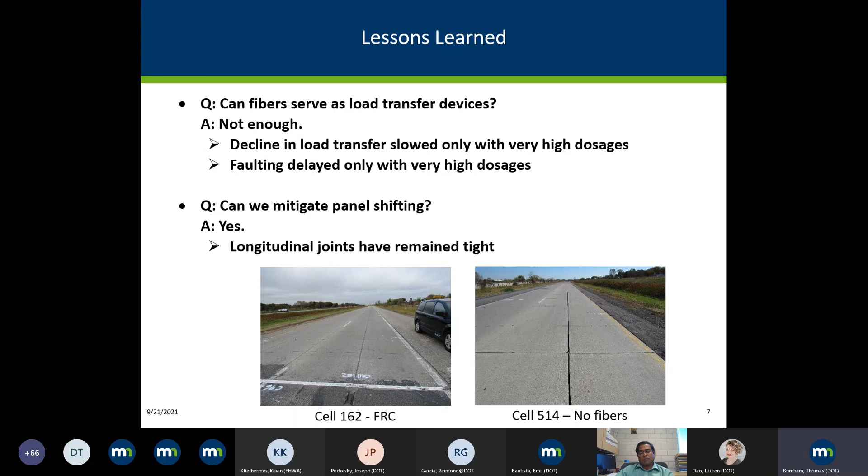So the question is, why don't current fibers work at MnROAD? When I say don't work, I mean I'd like to see more capacity out of them, especially with the joints. Some of the reasons are that the fibers we've been using were really developed for industrial floors, and we have different loadings, we have climate to deal with. So it's kind of a tall order for a fiber that was not really designed for those criteria.

The current fibers do not have pre-stressing behavior, so the concrete itself has to carry the load until it cracks, and then the fibers are engaged. The fibers can really only reside within the paste. So we also have this issue that we have very optimized gradation mixes, we want less shrinkage, we have less paste. Well, the paste is the only place that you can put a fiber. So that's something we have to also address, perhaps there has to be some changes in the type of mixtures that we make.

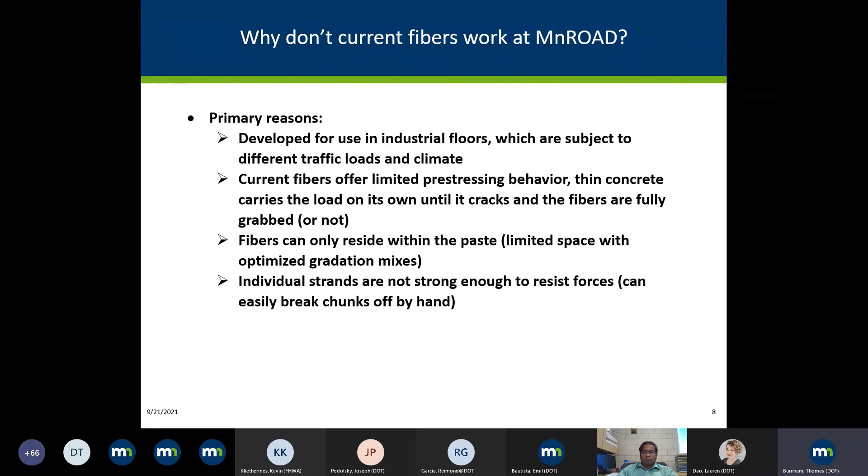And as I've shown before, the individual strands themselves are not strong enough to resist the forces. So perhaps the fibers we have been using so far, we need to look for something more robust, down to even the individual fiber itself.

So the question is, we've been at this for 20-plus years. Do we give up and say no, not quite yet? Because at least in our climate, from what I'm seeing, I think fibers are going to have to be necessary for these thin concrete overlays to remain competitive. Because if we develop faulting very early on, that's an extra expense over and above the initial cost. So my hope is that we do find a fiber that will serve the purpose of mitigating the development of joint faulting. And we've only used 2 types of fibers in MnROAD experiments. There are other fibers out there that we have not had the opportunity to try, and perhaps they might work better than the ones we did.

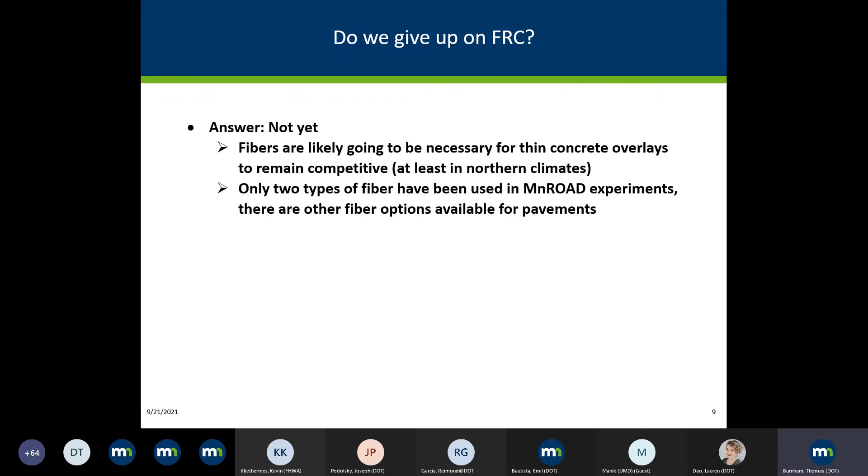A lot of the observations I'm seeing, even now we have MnDOT projects, and they're behaving quite similarly. So we are already going down this path, and we already have the Call for Innovation project that we're glad to have Manik involved in, and that's to develop a fiber that will serve the purpose we're looking for. His first task is, of course, to identify the forces we need to survive. Again, when I can go out and pull out a chunk, I think we need more capability than just 20 pounds per strand.

Maybe the dosages we're using are just too low. We base everything on C1609 at a 20% residual strength. Perhaps that's not enough for pavement. It's good for adding fatigue capacity, but perhaps we're looking for the aid of joint load transfer, so maybe we have to put in more. But we have to consider workability, cost, and sustainability. If we need more paste to contain more fibers, that's going the opposite direction of our focus of reducing cementitious materials in our mixes.

Maybe there's other materials that we know work, like carbon fiber or Kevlar, but those are very expensive at this point. Maybe at some point the price comes down enough that we could use them effectively in pavements. Interestingly enough, one of the initiatives we're exploring for MnROAD 2022 is actually the use of recycled materials for those fibers. That's another added element we'd like to explore, and there are some interesting things coming down the path related to that, which you'll be seeing eventually.

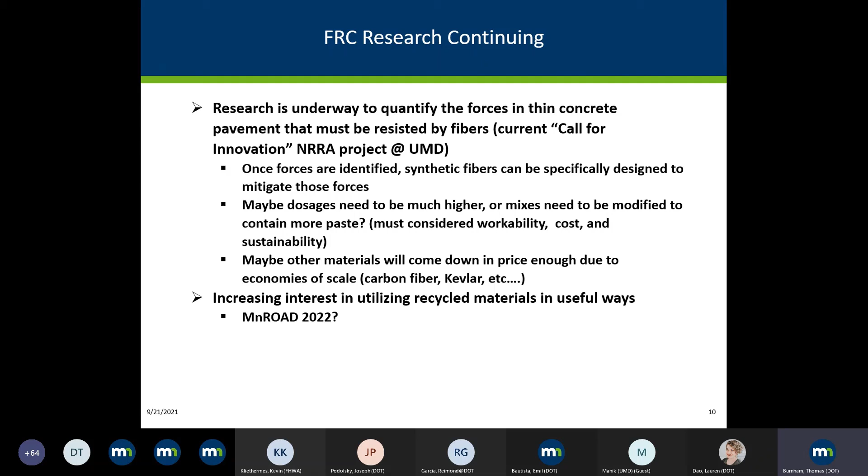So that kind of wraps up my thoughts on where we're at with research related to fiber reinforced concrete in the thin concrete overlays and on base. I just want to talk a little about this particular project, one of our first endeavors, not the first ones, but kind of our path forward on how we're going to be handling the new sections.

When we construct test sections at MnROAD, they far exceed the capacity we have for internal staff to be principal investigators. So starting with the NRRA, we decided we're going to start doling out and getting some help. I think it's a great process, because we're responsible for getting the data collected and processed, and then we hand it over to somebody else to do the analysis. In a lot of respects that keeps us on task, because before, we'd build a section and eventually get to crunching the data, but when somebody's waiting for the data, we have to keep up on it, and that's a really great thing.

We use a very open process, compared to something like NCHRP, where you start the project and wait until the end to find out what happened. We intentionally try to be very open, and this benefits both the principal investigator and the people on the NRRA team. You can see things as they evolve, and I think that's very beneficial and kind of unique to the process we're using.

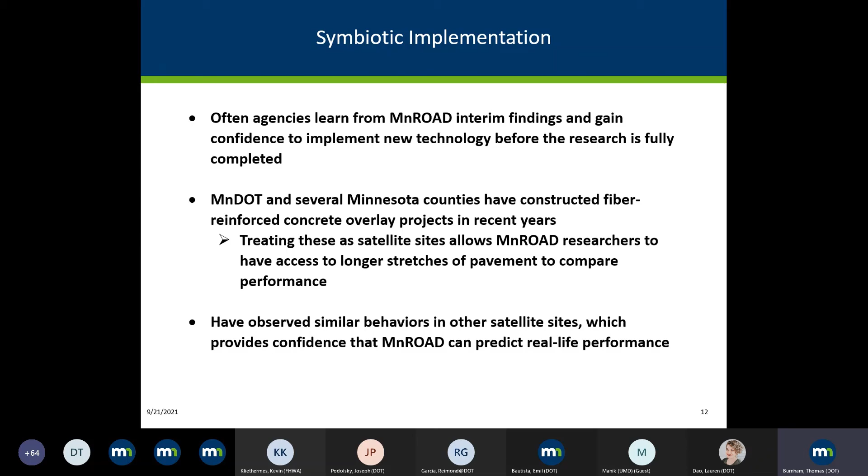With that, hopefully that gave you some perspective on where we're at with research related to fiber reinforced concrete, and also the process we're using with the NRRA. Thank you, and we'll take questions now.